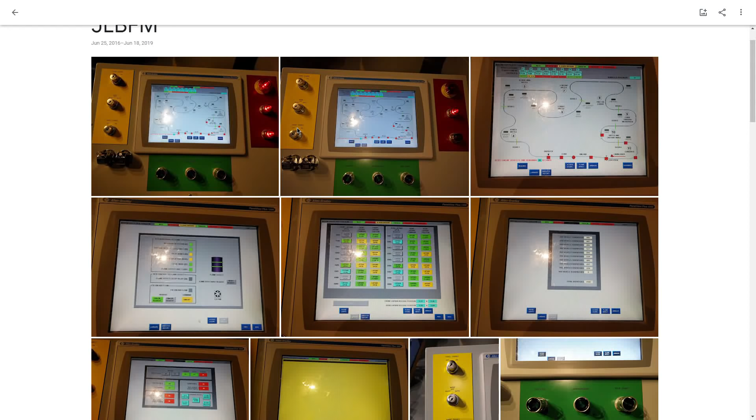So this is Justice League Battle for Metropolis, opened in 2016. This is the Great America version, but they're all the same. This is Magic Mountain, same as ours. I've been on the one at Magic Mountain, and I've been on the one at Great America.

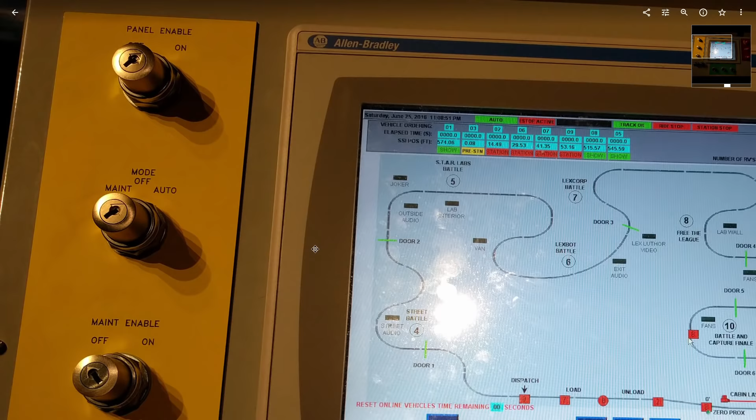So let's take a look at the panel. Most of the functionality is in the screen, so we'll get to that in a second. Panel enable turns the panel on and off. The modes are off, auto, or maintenance.

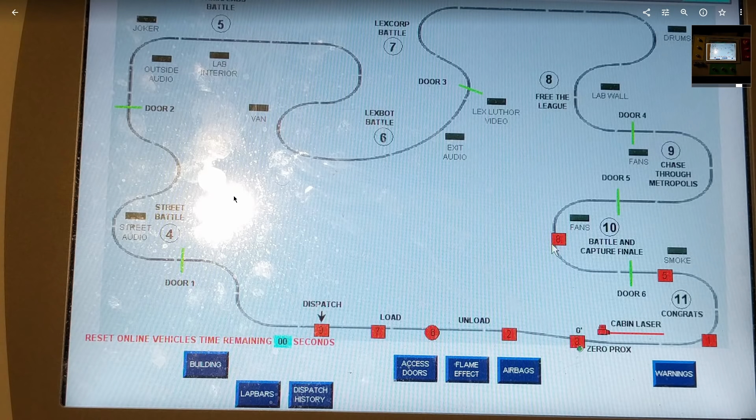Ride is always in automatic mode. Maintenance enable would turn on all these extra screens down here. These are the ones that the operators have access to. So for building, you could turn on lights, stuff like that, view statuses of certain infrastructure inside the building.

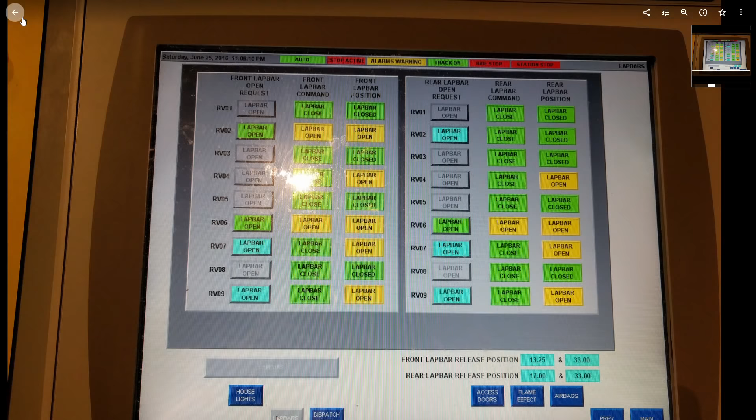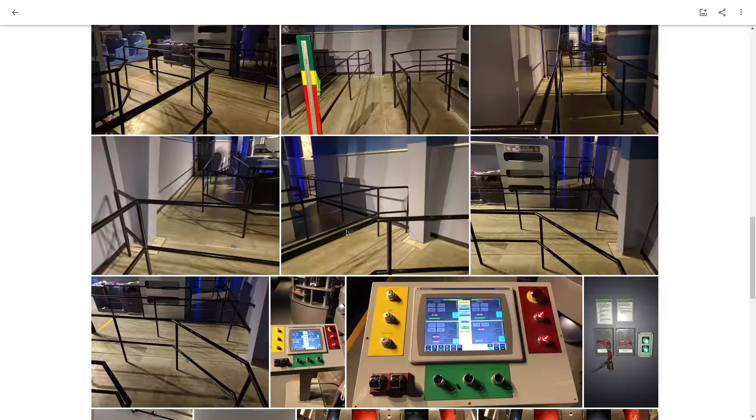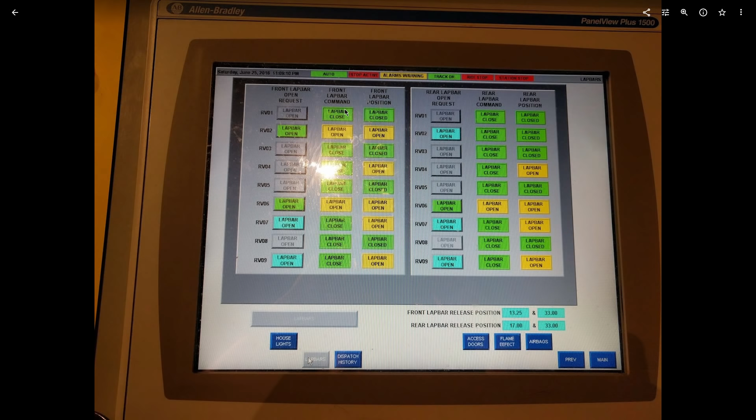Lap bars, let's see if I got a picture of that. Yeah, so this is what you're seeing when the cars, the RVs, are coming through. Unlike a roller coaster, the entire length of the ride, the computer can tell if a lap bar is open. A pretty common downtime at this ride was someone would be able to just barely fit, and the sensor would say it was okay, so you'd send the car out. Then halfway through, when it jerks around at a certain scene every time, that person would put some force up on the lap bar, and it would pop it like a millimeter up into the open position, causing an alarm.

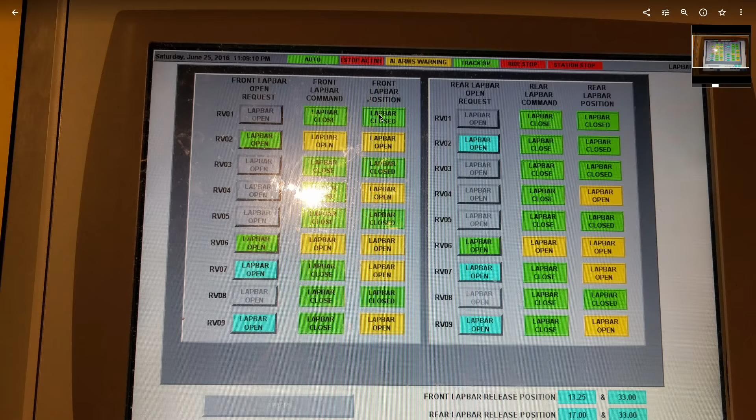But anyway, so they come in. This is the status when they're open. They automatically unlock, and then lock once they get to a certain point. If you want to open up a lap bar, you push this. These are the front controls, and these are the back controls. Command is the command being sent, and position is the actual position. So you can see this one, the command is sent to close, but the lap bar is still open. That's why it's like that.

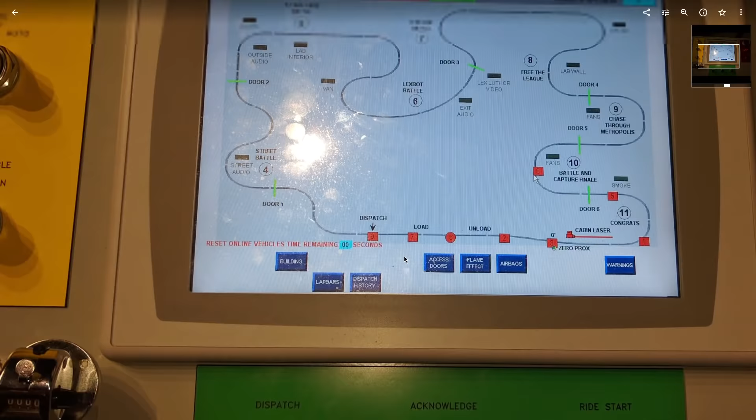When this ride first opened, it operated a little bit differently than it does today. I'm going to talk about how it used to run, and then in a bit we'll talk about what they changed. The only thing you ever did as an operator, besides opening lap bars if someone needed it, was press this dispatch button. The RVs pull in and just drive through, and once they get to this point, they'll stop.

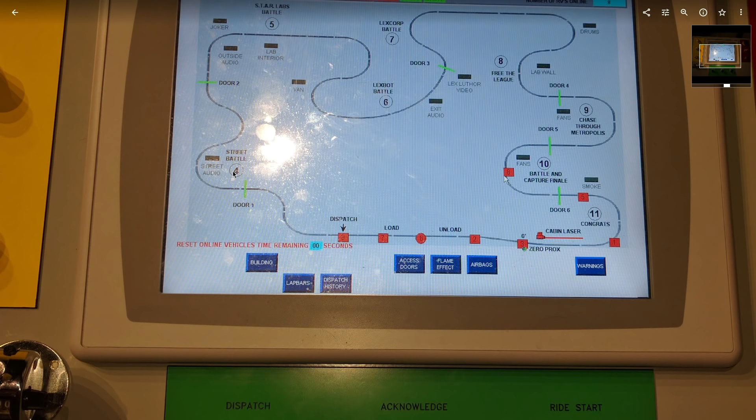The dispatch button will flash and you have to dispatch it out. I can't remember the exact blocking, but I believe once the car that was sent out got past door 2, it would let you send another one out. On this model, you could have up to 9.

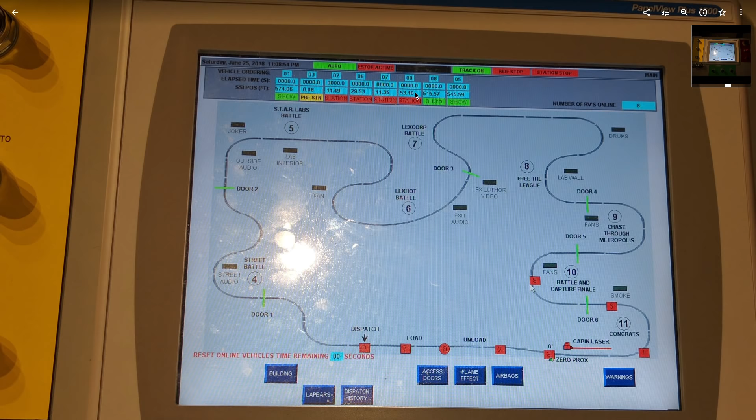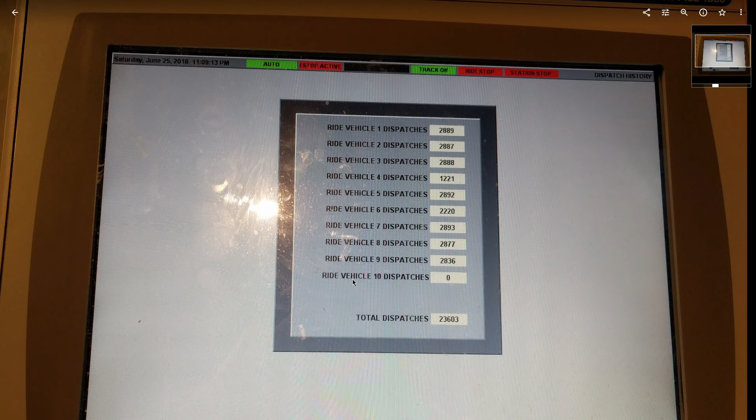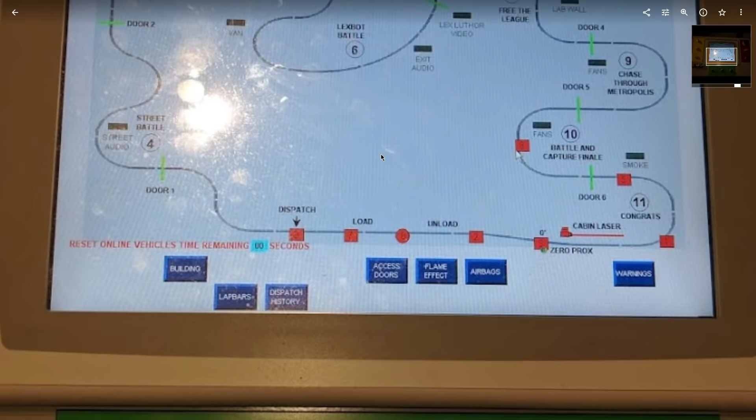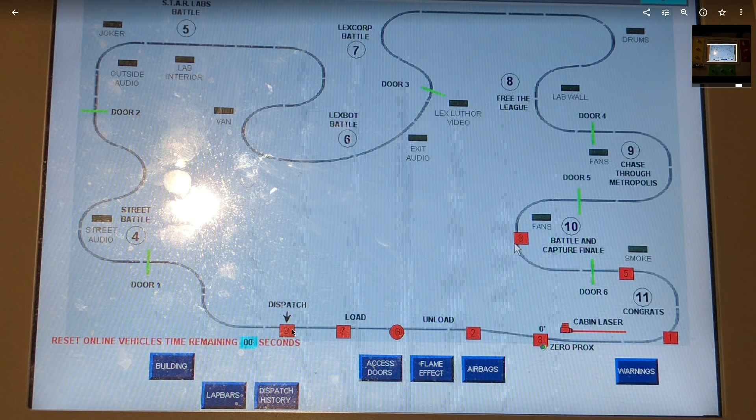But anyway, as the operator, you kind of just watch the cars diddle-daddle their way through. These right here are the show doors, so those open as a car goes through and then close so that cars can't see each other, which would ruin your immersion.

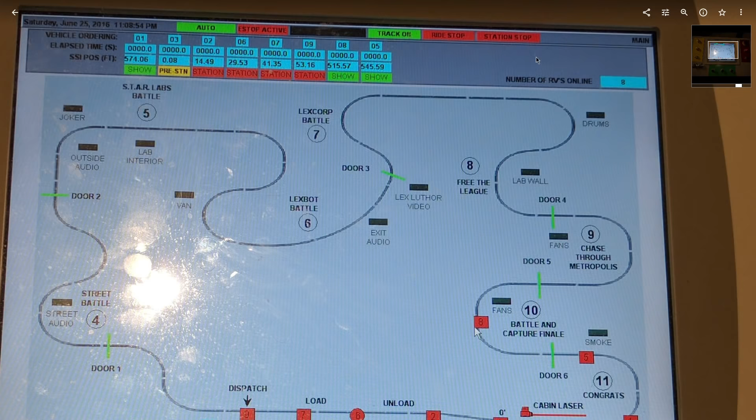So that's what this is right here, access doors. There was also a couple doors throughout the building that had sensors on them, emergency exits, so if one of those was opened while the ride was operational, it would cause an error. Flame effect.

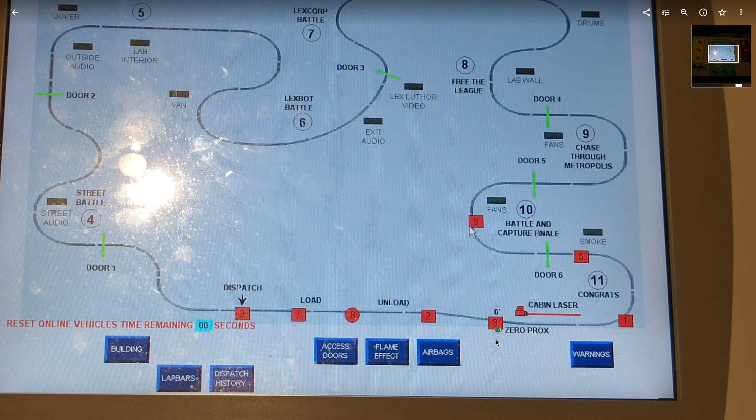I actually really enjoyed this. So this is the flame effect screen, and this fan, when the flame is on, this fan actually spins. There's a little spinning animation.

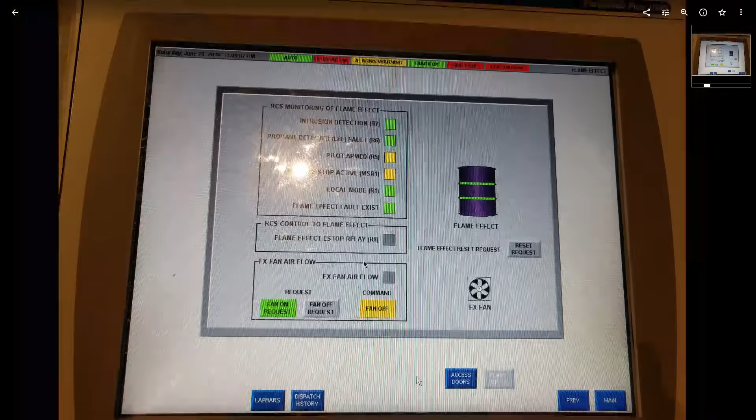But if you're riding Justice League and the flame isn't working, 99% of the time it's just because, for whatever reason, the computer decided that there was an error at the flame effect, and all you had to do was press this button, reset request,

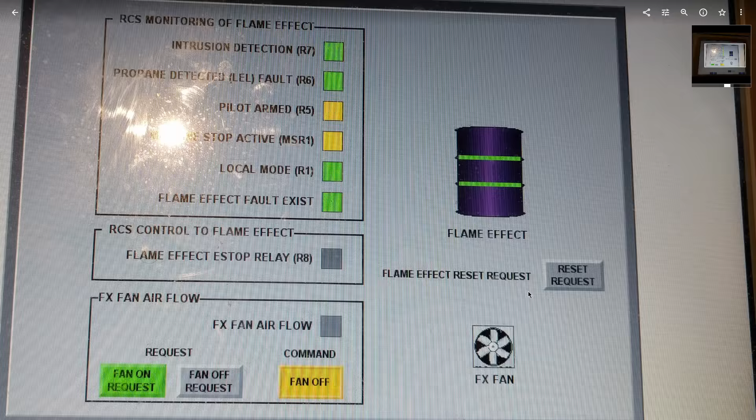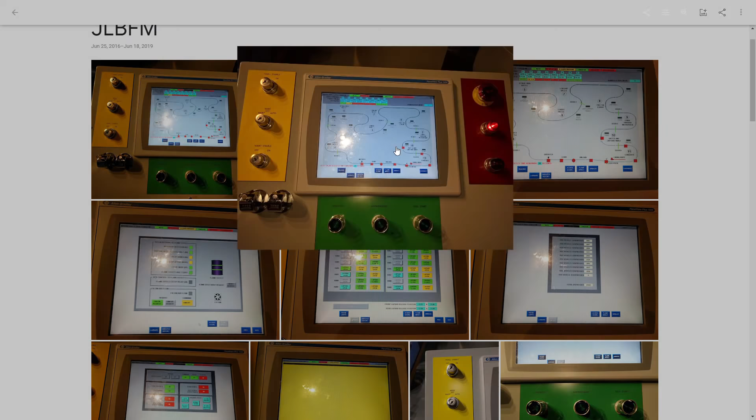and it would start working again. Acknowledge, I'm trying to remember. Oh yeah, so acknowledge was when the person at enable, which is at the unload position, if they press the station start, I believe you pressed acknowledge to start the station. And anytime the station was stopped while the operators were running the ride, the person at the back had to confirm to start the station.

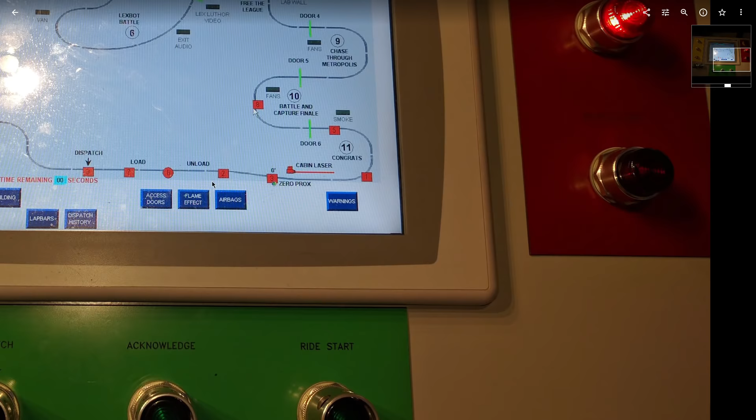And then, so over here, this station stop stops all the cars just in the station. All the other ones will continue to go around.

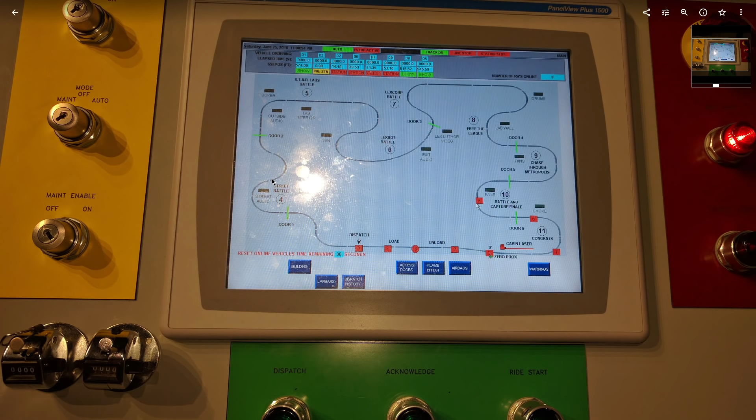Ride stop is interesting because it doesn't stop them right away. It stops a car at its nearest, maybe control point, but it was basically the area that the camera was looking at because there's a wall of monitors. I don't know if I've got a picture of it. But to the right of the operator, you've got a wide array of cameras. And so when you press the ride stop, all the cars would stop in position so a camera could see them. If you hit the E stop, that cut power to the track, and all the cars would just stop right where they were.

Another interesting little tidbit, because this ride's so smart, is if a fire alarm goes off inside the building, after 30 seconds, the lap bars on all the cars throughout the building actually open up automatically. So that's kind of interesting. Cool little safety feature.

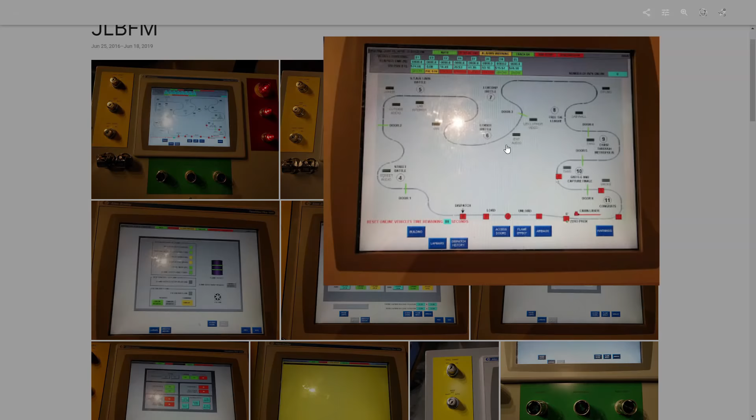But yeah, you can see the status of all the things going off. So as they go by, things go off. Like the thing that honks at you, that's over there. Certain effects, the drums that fall on you, that's what that is.

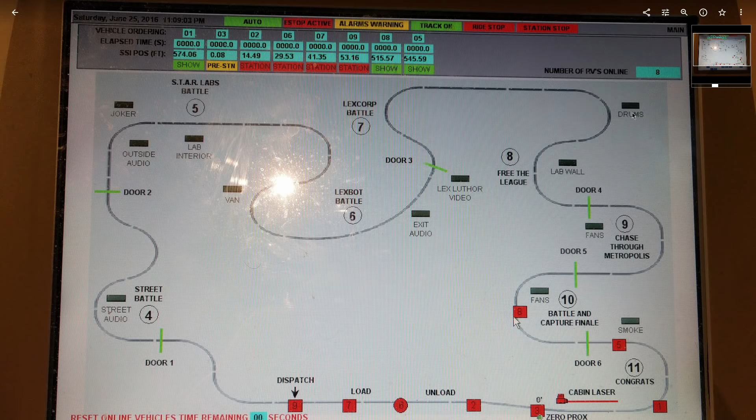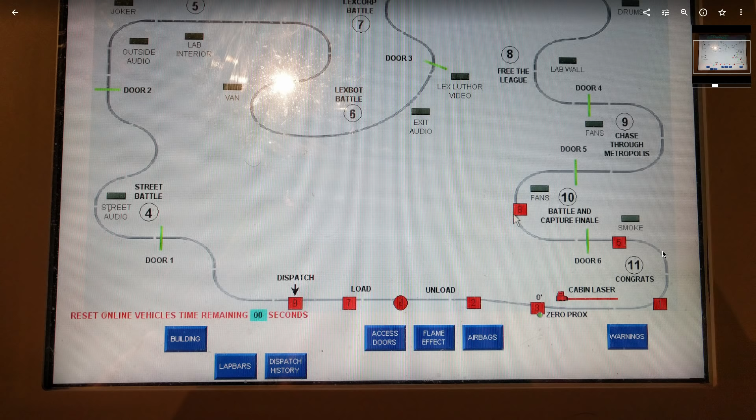So these are all the scenes: 4, 5, 6, 7, 8, 9, 10, 11. This is that final part where you come around, and so the cabin laser actually shoots when there's a car back here. A laser shoots at it about right here, and it can tell where the exact position is that the car is facing forward. And that was important because you didn't want a car to come in sideways or something because the station floor is right there.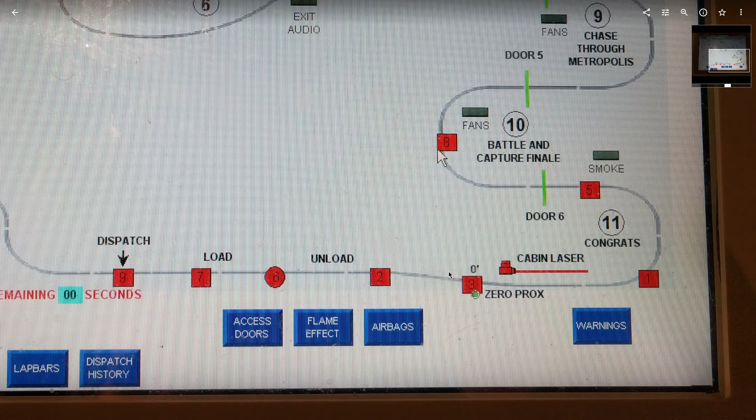Had to come in straight. And there was an annoying bug when this ride first opened. I mean, maybe it still exists because they never fixed it that I know of. But car number 7, every time it got to this point, even though it was facing forward and it could just pull in or rotate about 4 degrees to the left, instead it would sit there, and every single time it came back, it would rotate a full 360 degrees the opposite way of which it was supposed to go. So that was quite annoying because then cars would back up behind it.

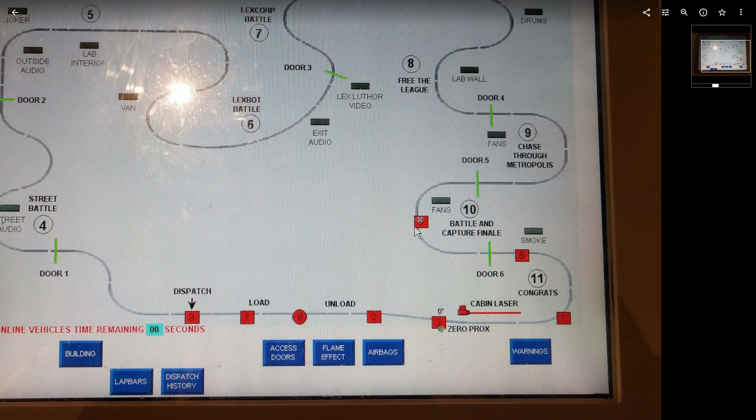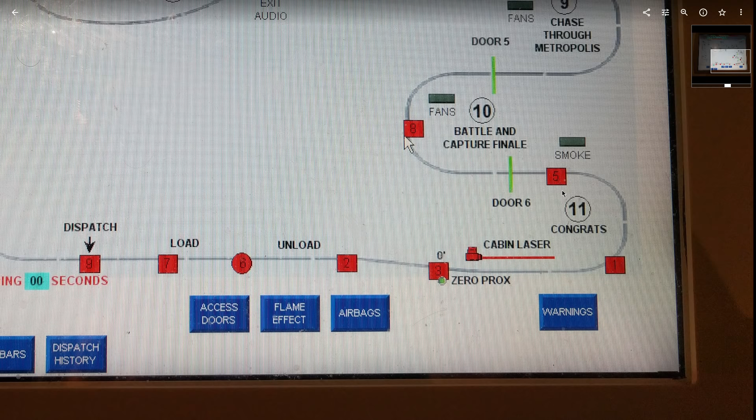And so this right here, it's called the Cascade Stop. And so if the station's backed up, cars will start stopping at their scenes. So one stops here at the zero prox, one stops here, one stops here, so you can have a car waiting and a car looking at the finishing screen where it tells you the high score and all that. And then you could have another one here. So if there was ever a time where someone was taking unusually long to load into a car, usually people would stop back here.

And there was some bug when it first opened, I remember, because it was always a pain when they all stacked up, especially when you had all 9. It wasn't that difficult to stack them up. And if you did that, then the people that came from show 9, they got stopped here because there was a car in show 10. Once they got to show 10, they would just be in front of an empty screen and nothing would happen.

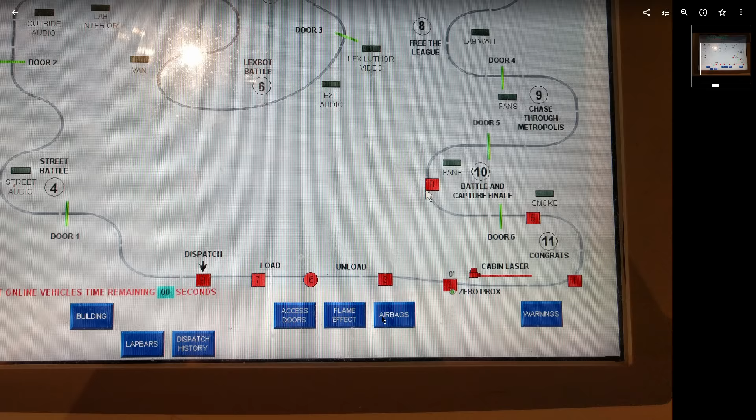So airbags, underneath, there's tires obviously that go on the ground, but then there's also tires that squeeze this track right here, and that's what drives it forward and back. And there's airbags that give pressure to the wheels so they can stay attached to this.

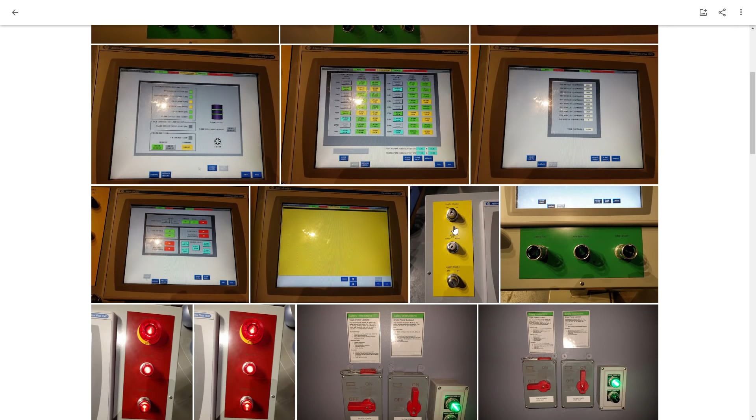The reason you'd want access to the airbag screen is because a lot of times they'd be leaking or not properly filled. On this screen, all the cars are red because the ride is stopped. If a car is having issues, like if the airbag is low, it'll be traveling around blinking yellow, so you'd call that in.

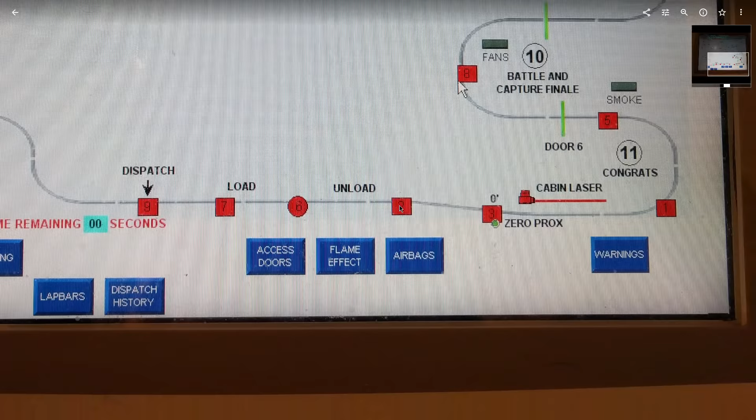There were warnings and then there were alarms. Warnings would be like RV6 low airbag, and if there was a warning, the ride could continue to operate. If there was an alarm, the ride would stop.

Depending on what type of alarm it was, it would either be a ride stop, where they all stop in front of a camera, or it'd be an e-stop, where everything would turn off, the lights would turn on, and the music would stop.

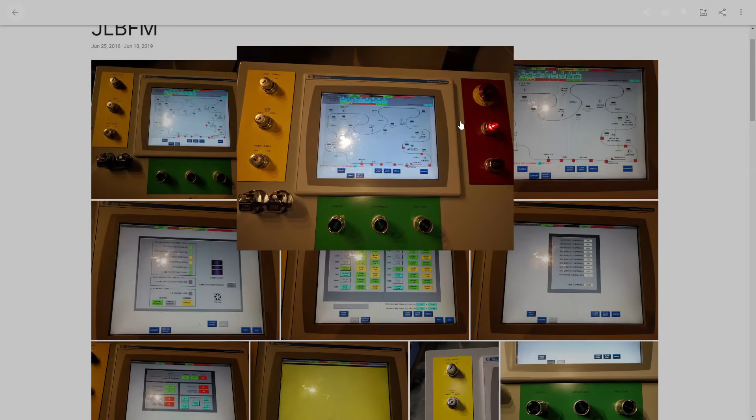Something interesting was that when you hit the e-stop, it didn't technically cut power to the ride, because if someone ever fell onto the track, you were supposed to press an e-stop and then switch the track power off on a separate switch - the track power lockout.

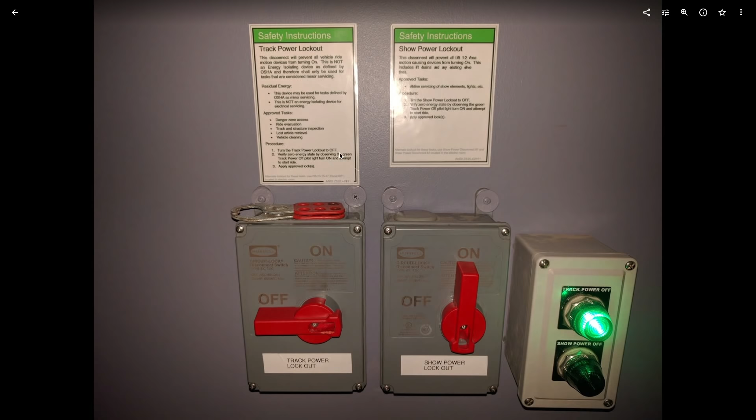So this right here, if you ever needed to go inside the building, you had to turn the track power off. You don't want to get zapped by the high voltage running through there that's pushing those heavy vehicles through. And the show power disconnect would just turn off all the show elements.

I don't have a picture, but over by the flame effect, there's another panel with lockouts and stuff on it, so you can adjust just the flame effect.

This is the building screen, where you could turn on or off the lights. When you turned the lights on or off, it actually took a little bit, and that was called pulsing.

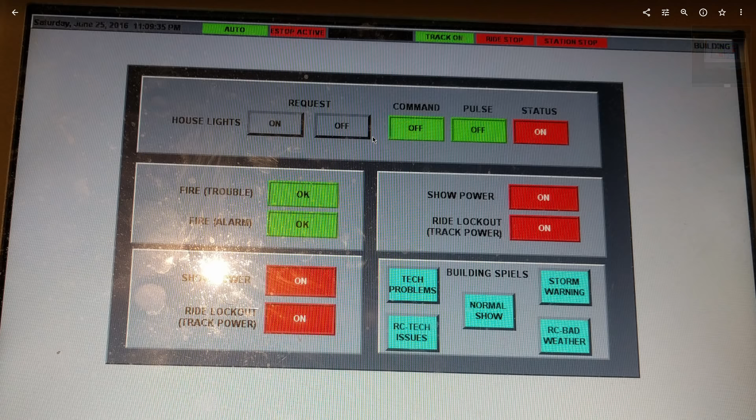It would turn off certain zones, and then it would all go dark, and then boop, everything would turn on real quick. The fire alarm is tied into the ride system, so it can automatically let people out.

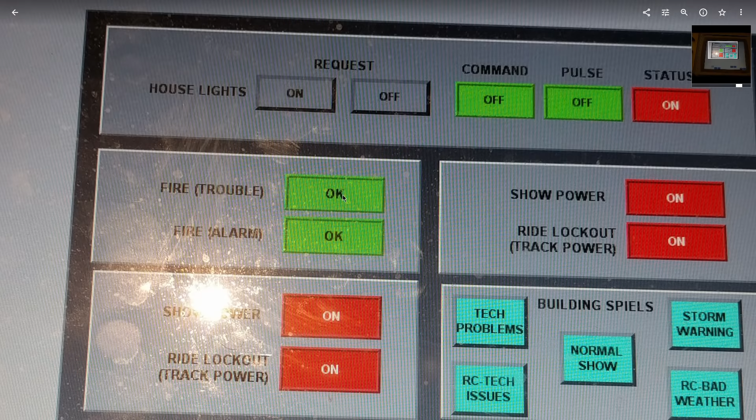These are the lockout statuses.

These building spiels never worked - nothing happened when you pushed these. I'm sure there was some sort of spiel they wanted to put in with the Justice League saying the ride was having issues, but that never happened.

The way it works now - back then it would come and park right here, and then you'd dispatch it forward. Now I believe the dispatch spot is all the way up at the loading gates, so every single car is supposed to stop, you put them on, and once they're good to go, you dispatch them individually.

When it first opened, it was kind of just a continuously moving station. If the ride was ready to dispatch before the car had reached this point, you could push the button and they would just take off from wherever it was.

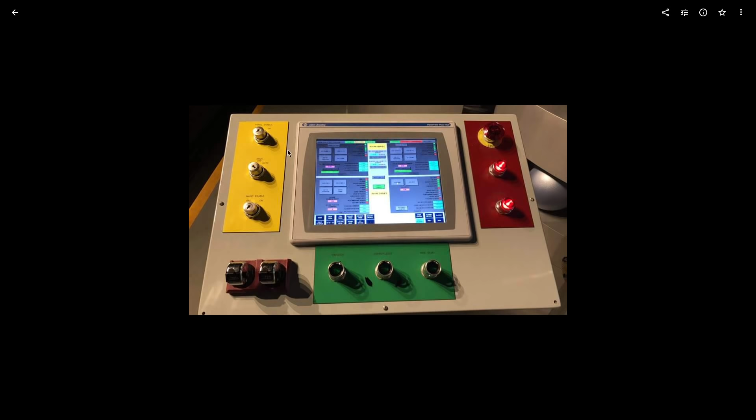I'm not sure what this screen is, but there were hundreds of maintenance screens because this is a very complex ride.

All these cars are actually on a Wi-Fi network, so that's how it communicates with the control system. There's no wired communication on the track, it's all wireless. So if there was spotty Wi-Fi for whatever reason and it lost communication with the car, that would usually cause an error.

And these blasters, oh my god, they did not last. I think even on the first day we had a couple tagged out already.

It's multiple systems that work together, because there's the system that controls the ride system, the system that controls the cars, the system that controls the video game aspect and keeps track of all the scores, and then there was the system that controlled all of the show elements, and those things all had to work together.

At Magic Mountain they had a little bit extra, you had to go through all these pre-shows. I remember, even though we were the only ones there, they forced us to watch each pre-show. Their station's a little cooler, a little bit more well laid out.

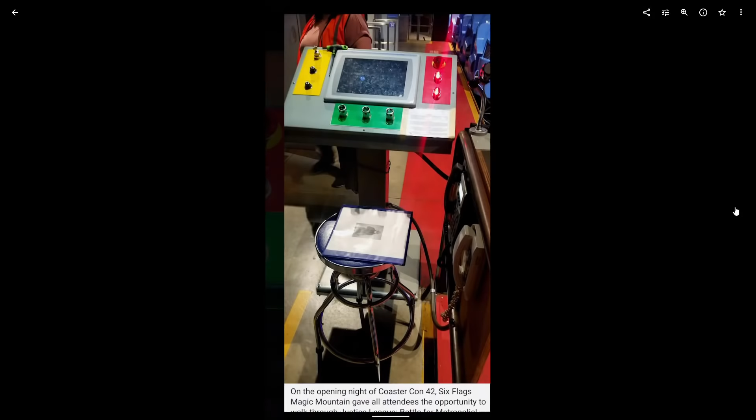And their panel is exactly the same, ride system's exactly the same. All that's different is the ride itself is a little bit different.

So if a ride stop was pressed, you could push a ride start and everything would just resume automatically.

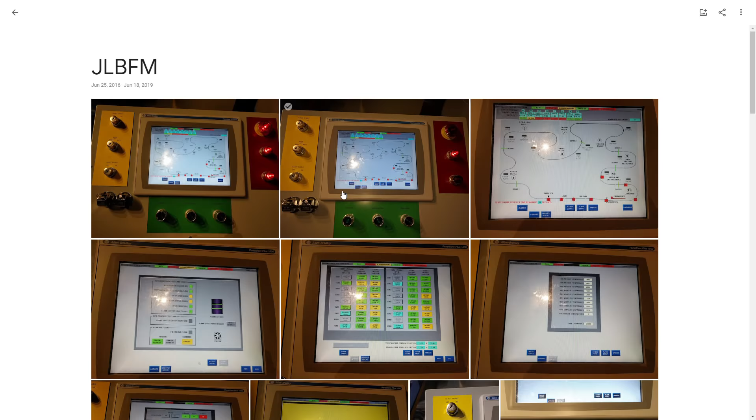So yeah, this is one of those rides where it's very complex internally. There's a lot going on, but for an operator it was so simple. This ride was so boring, it was the first ride we ever let someone sit down at operator. It's the first ride we gave a chair to, because all you did was just push this dispatch button over and over, pushing these cars through.

Yeah, I think that's about all I can remember. I did open this ride, I was the supervisor of this area when it opened, so I was here a lot.

I remember when it first opened we had a lot of downtime issues, and it was usually just little things, little sensors would get tripped up, but we'd fill up the sheet you write down the downtimes on and have to start a new one on a daily basis. It was pretty ridiculous how often this ride went down.

Very terrible downtime. And I know the St. Louis one had it even rougher, I think they had like less than 50% uptime.

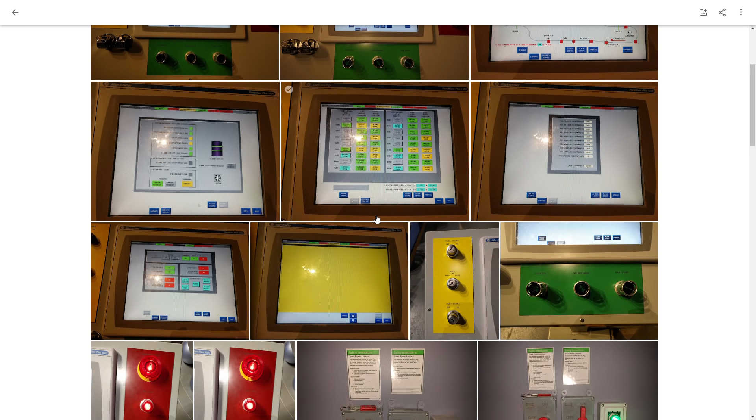But yeah, I'm trying to remember anything else about this ride. It was pretty simple to operate.

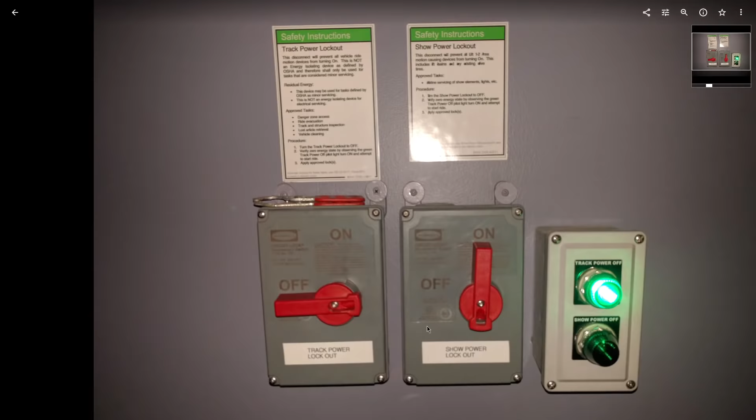I don't have a ton of good pictures of it just because I wasn't all that interested in it. I thought that for the money they spent, because they advertised it like, this is our hypercoaster, this is the hypercoaster we're building, and I was like, you know what, I actually would rather have us have built the $20 million roller coaster instead of this thing.

And it was also very frustrating because it was very low capacity. And the three across, it's not built for efficiency. I mean you got a group of two, and then you got a group of four. Well what, you're gonna put one of the strangers next to the other two strangers, and then three back here. They usually didn't like that.

And then you had people abusing the single rider line, all that. And they used really cheap paint, so people would pull paint off the wall. And there was a fire alarm in this room that had a cover on it, and if you bumped into the cover, then the fire alarm would go off, so that happened all the time.

But yeah, I think that's all I got for this one. Like I said, very simple to operate, just very complex internally.